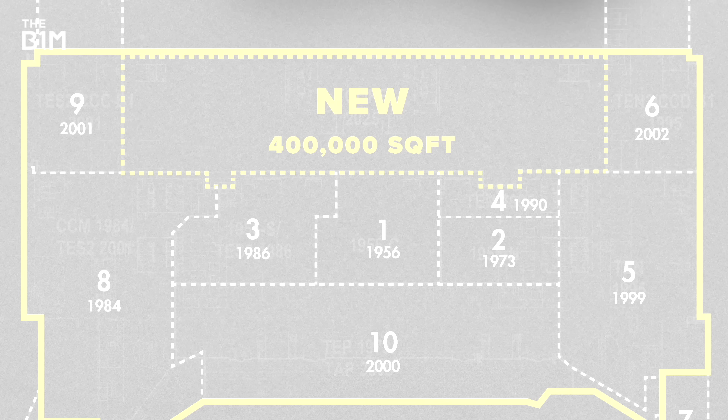Steadfast and reliable, it was always one of America's better airports, but for years it's been in desperate need of an upgrade. The original terminal was constructed nearly 70 years ago in 1956. Over time, development has seen it spread across 11 separate buildings. The problem is that they were all designed and stitched together under varying structural and seismic codes.

And that made it near impossible to expand and evolve pretty important features like security checkpoints. Structural impediments like shear walls and brace frames had to be removed to allow flexibility in case of a need for future adaptations. Portland Airport, or PDX, was in need of a dramatic refresh. And so more than $2 billion was spent to modernise the site.

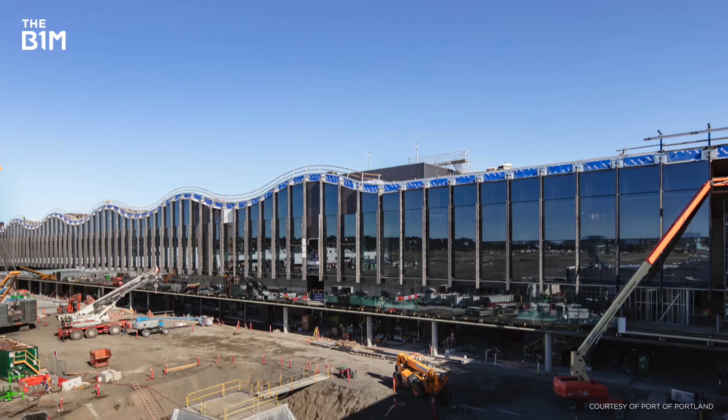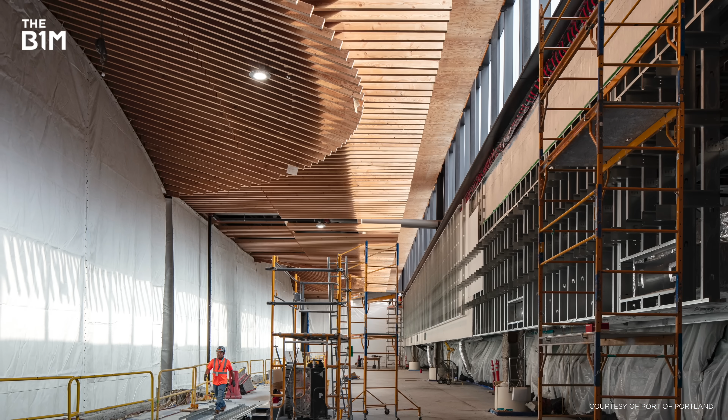Now I know that might sound like a lot of money, but by the end of this video don't be surprised if you're checking flight prices to Portland, because this is no minor renovation. And I really mean that. The new terminal, which opened earlier this year, is the biggest public works project in Oregon's history. Not only that, but it's also the largest mass timber project of its kind anywhere in the world. You absolutely can't underestimate the scale of what's been undertaken here.

But with that said, ZGF Architects and the Port of Portland were keen to make sure PDX still felt accessible and like part of the city. That meant bringing the outdoors indoors to reflect the natural beauty of the state, and working with contractors Skanska and Hoffman, that's exactly what they've done.

The Pacific Northwest is known as a timber basket, the timberland. So we took inspiration from the forest of our region, inspiration as a walk in the park, and then make sure that they knew that sense of place, that this was the Pacific Northwest and not any place else in the country. It took 6 years to establish a supply chain to source all the wood for the roof.

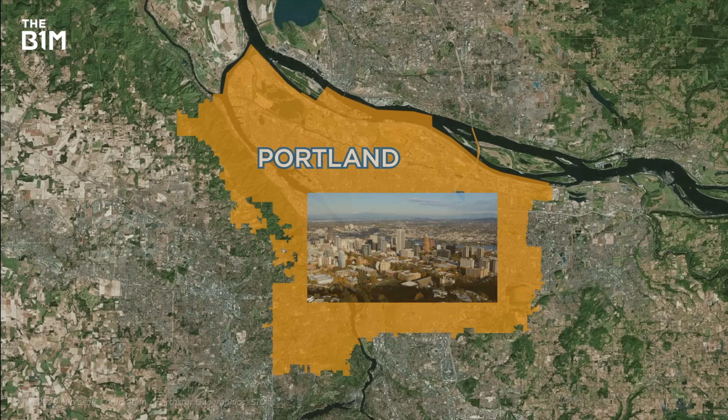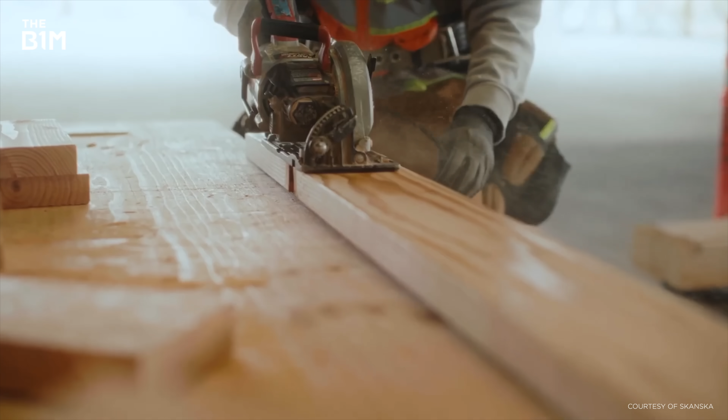And impressively, it was all sourced from within a 300-mile radius of the airport. With mounting budget pressure, a lot of projects focus on importing the cheapest materials from all over the world, but that's not been the case here. The focus was on building sustainably using local craft and timber.

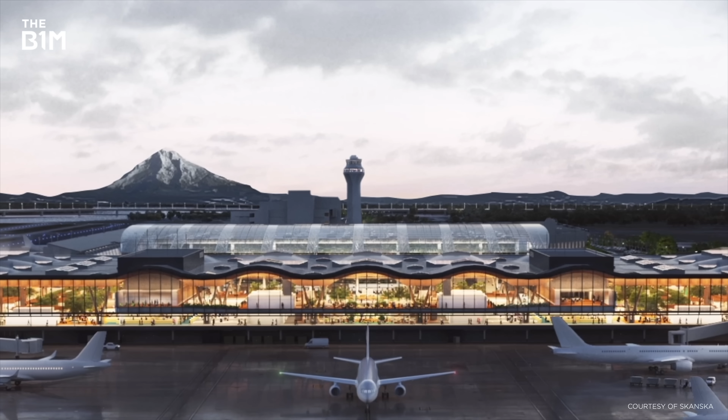Now, let's get back to that beautiful airport. Walking through the new terminal once all the work is complete, you'd be excused for thinking you're strolling through the city's famous Forest Park rather than rushing to catch a flight. You'll see more than 5,000 plants, including fully mature black walnut, ficus and olive trees. They've got access to the natural sunshine that pours in through the 49 strategically placed skylights.

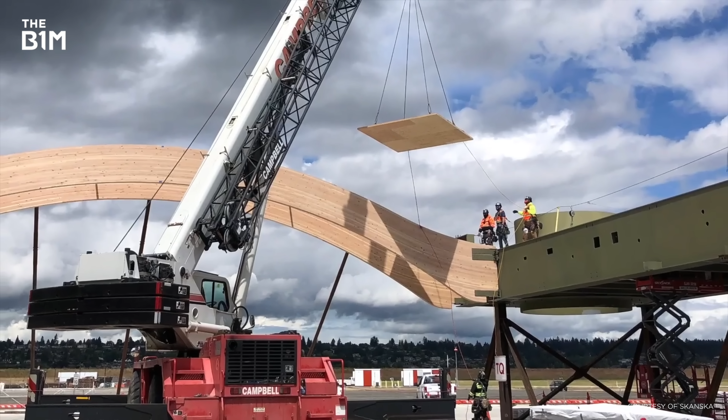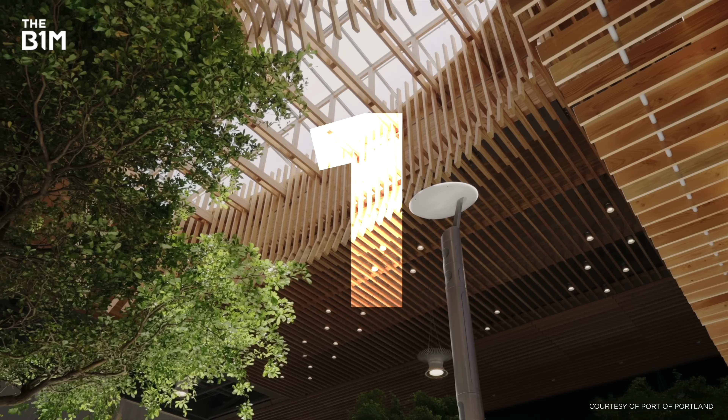The ceiling is a lattice design spanning 9 acres and 600,000 board feet of Douglas fir timber taken from 11 forests. Coupled with the wooden ceiling, a biophilic approach has been used throughout the terminal for 2 key reasons. The first is to sequester carbon emissions and make this project as sustainable as possible. But also, a natural space is thought to lower blood pressure, making your travel experience more relaxing. You might not think of an airport as a calming space, but that really is what Portland is going for.

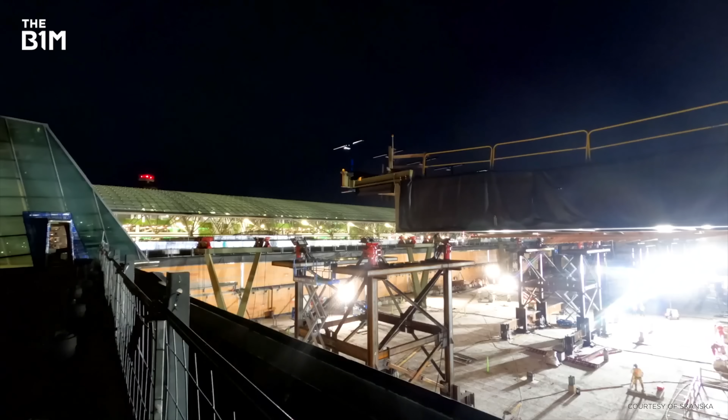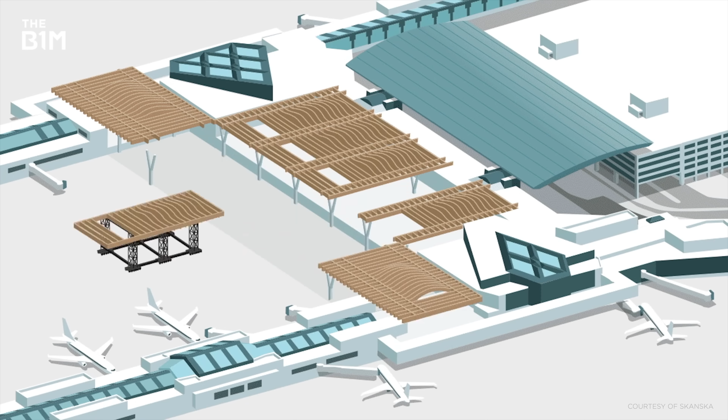It all sounds great and definitely looks the part, but here's where things start to get really interesting. For the entire 3 years that this renovation was taking place on the building footprint, the airport remained open. These major renovations had to navigate a live site operating 500 flights every day. Now, the thought of that might give you a headache, and it probably should, because the logistics of running and overhauling an operational airport are incredibly intense. But here's how they did it.

As I mentioned, the building skeleton is split into various sections with the main terminal in the middle and concourses in the flanks. Key operations like ticketing and security were moved to the front and sides of the building. That allowed for demolishing the remainder of the structure behind while keeping the baggage system operational. Around planes arriving and departing, a section of the airfield became a work site for pre-constructing that incredible roof.

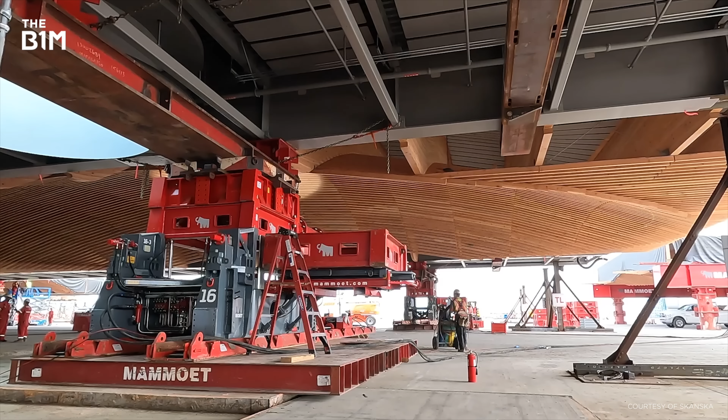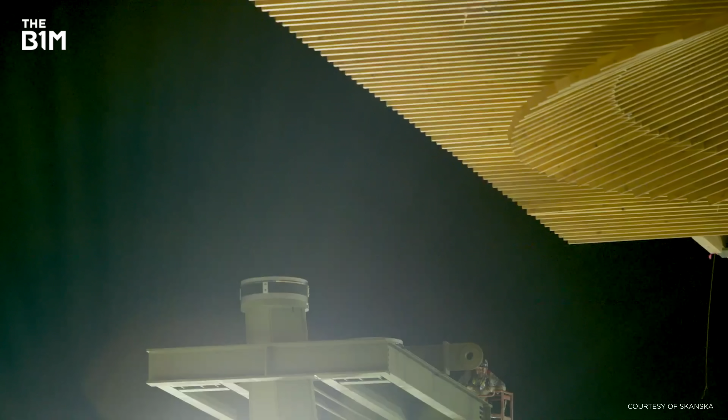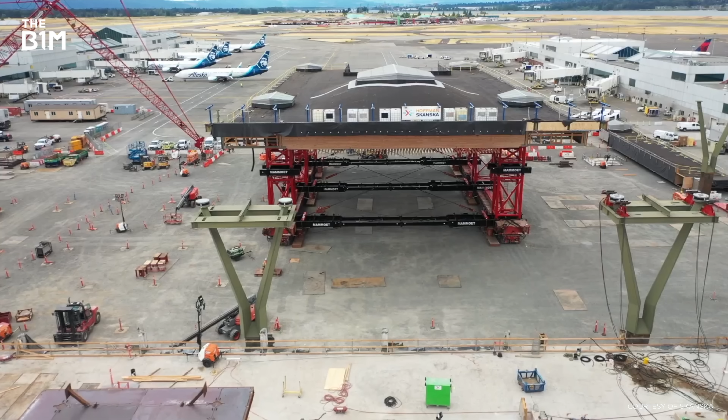It was crafted into 3 massive sections made up of 18 different pieces, with each weighing anywhere from 270,000 to 635,000 kilos. The biggest section stretched more than 40 by 60 meters. The roof was built with big steel box girders, so 2-foot by 6-foot tall box girders on about a 100-foot grid. And then in between those girders was built up with curved glulam beams and the mass timber panels on top of it and a roofing on top of that. And under it was latticed a series of, I think it was 3 by 6 lattice to give the beauty of the roof.

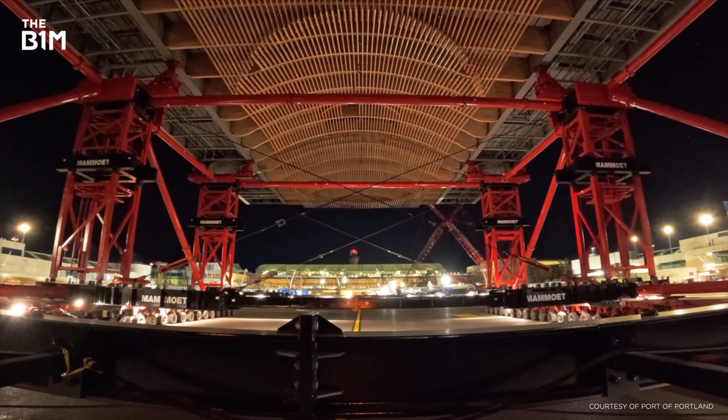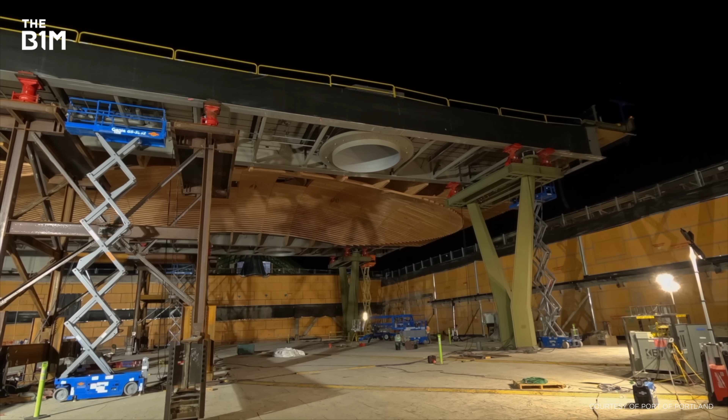To get the roof into position, the sections were separated and drawers slid out from between the girder sections to lift the roof up to 17 meters. They then had to be moved for about a mile from the construction site at the end of the runway at about 1 mile per hour. Each section of roof took around 3 nights to move, one to drive it to the starting position, the second night to move it halfway, and the final night to get it into position. Once slotted into place, security was able to move into the new building.

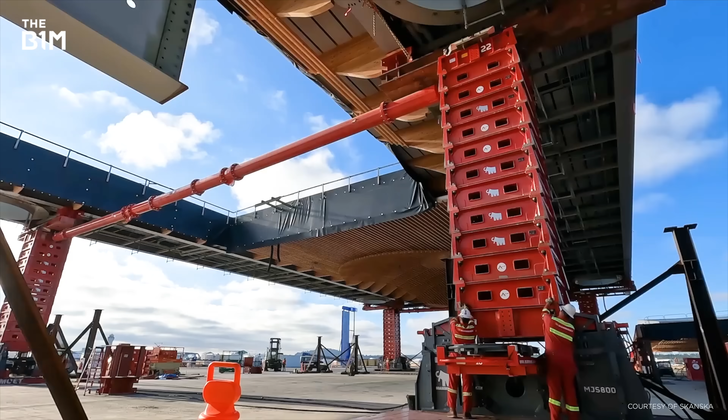Now, it's not every day that you see an airport roof, especially of this size, wheeled across an operating taxiway. And don't forget that there's one key factor when you're working with wood. It really doesn't like getting wet. Going through all of this effort for the roof to then expand and not fit into place would have been extremely frustrating.

But luckily, there was a novel solution. While we were prefabricating the roof, as soon as wood showed up, we would put a temporary roof on it. We'd put a membrane on it to protect it from the elements. And that was the primary strategy in keeping it beautiful before we actually moved it into final position. So a roof for the roof, but this wasn't the only problem the team had to face.

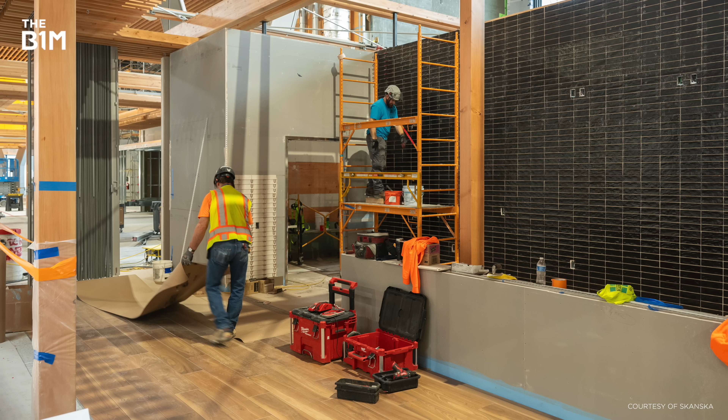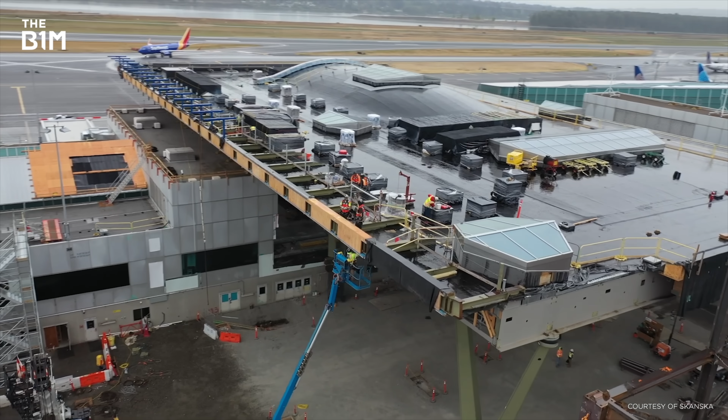The area underneath construction wasn't empty, it was being used for Portland's baggage system, meaning it was an occupied space. And so all the fitting work had to happen during terminal downtimes between midnight and 3:30 a.m. Because we were taking these massive roof sections over an occupied space, during the non-downtimes we had to tie it back in seismically, so if there was an earthquake, the roof didn't fall on the people down below it.

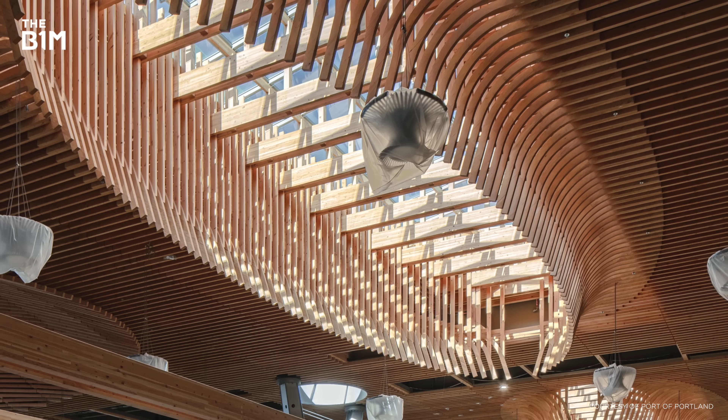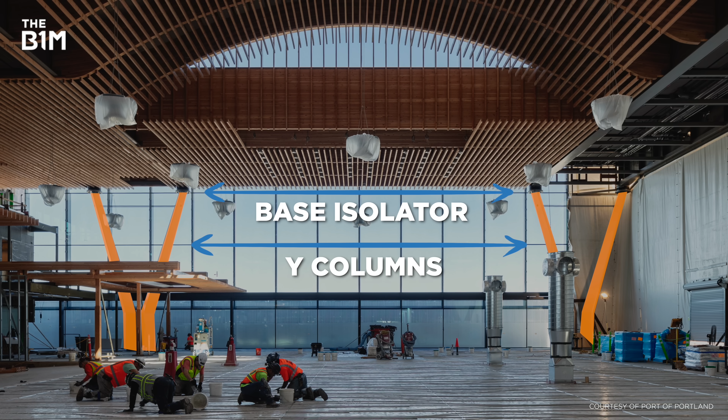Yeah, we forgot to mention another small problem. Portland is Oregon's most seismically active region, with scientists predicting a 37% chance of a major earthquake in the next 50 years. So PDX needs to be ready, and it will be. In the event of an earthquake, the whole roof is designed to move as one. What it's supported on is Y columns, so that the columns come up, and on the top of each Y is a base isolator. It's a friction pendulum isolator.

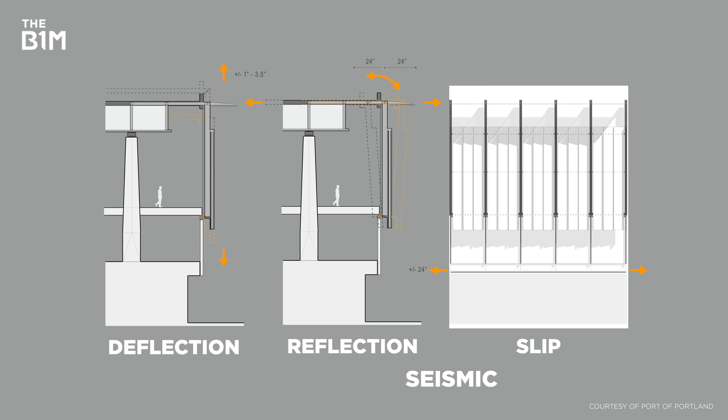And so that has been engineered to take the mass at each location. And so at the edges, you might have a different size friction pendulum. In the middle, you have another size. And those move, and it's calculated that the amount of friction force that is taken at each location allows it to move exactly how much it needs to move. And the friction part is what holds it into place. That allows for 61 centimeters of movement on the friction pendulums.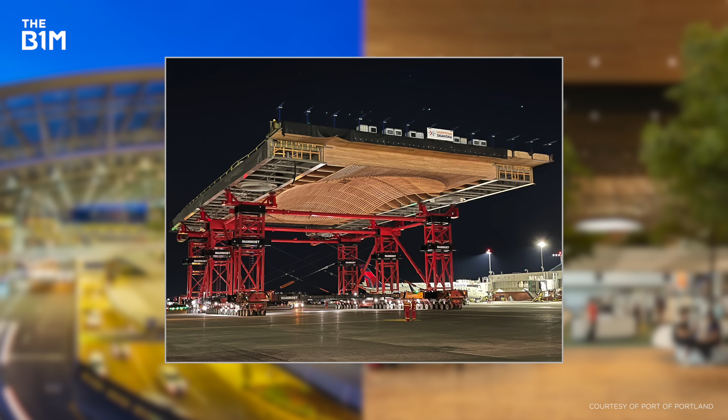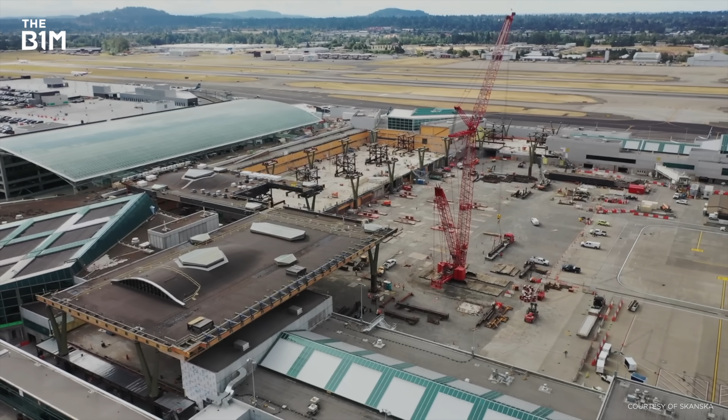That means that where the roof touches adjacent surfaces like solid walls and glass, they have to pivot in all directions, and that took some pretty special detailing, mock-ups and testing. Astonishingly, it's all come together and it really does tick off the big three: stunning, sustainable, and hard as nails. This project has been far from straightforward to engineer, but it'll mean Portland International can go about doubling capacity over the coming years. By 2045, it's hoped that 35 million people will travel through here.

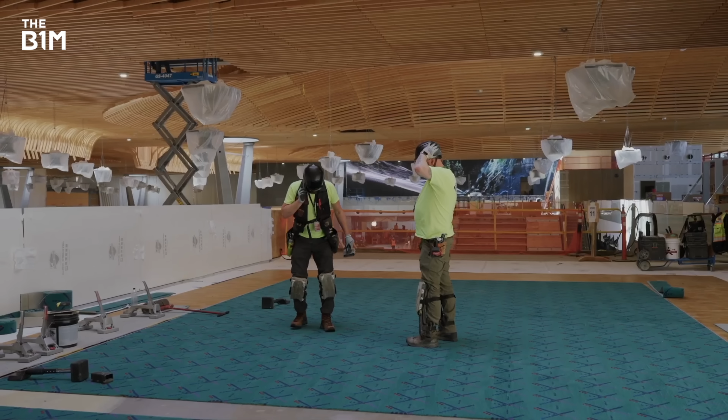And when they do, they'll be met with a sense of whimsy that really sums up the city and this project. If you've been here before, you'll be familiar with the famous PDX carpet. Some would say it's the most iconic in the world. Stiff competition for those found in the UK's Wetherspoons pubs. But if you're worried about missing it, don't be, because it survived the renovations. You'll find recreated sections of the carpet hidden around the airport in relaxing areas ready for snapping shoe selfies, if that's even a thing.

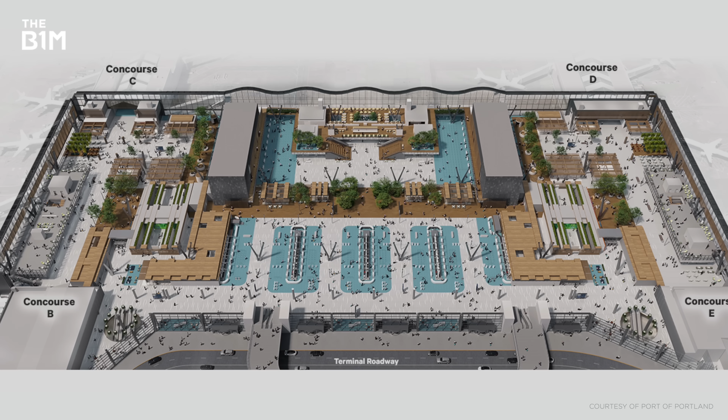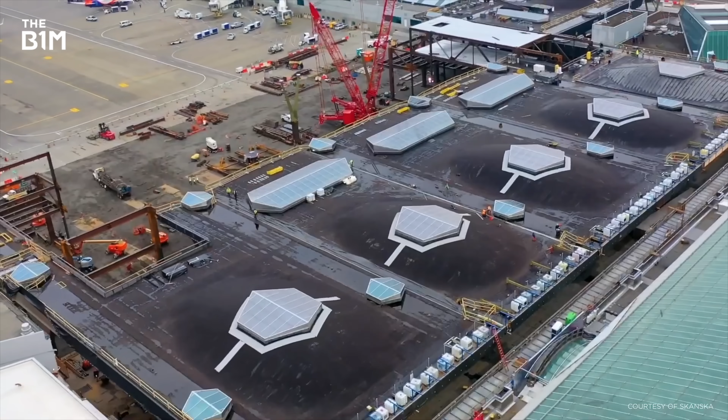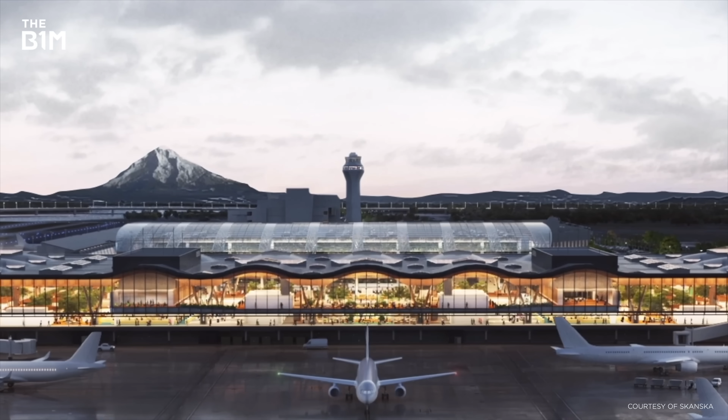All jokes aside, getting to this point has been a monumental effort, but the work isn't finished yet, and Phase 2 is now already underway. It includes 11 new restaurants and shops, permanent exit lanes, more escalators to baggage claim, and cosy areas for when you're waiting at arrivals. They're planning to have all the hoardings down and works complete by late 2025. Only time will tell if PDX can land itself a spot near the top of the world airport rankings. But whatever happens, it's beautiful. This place is a shining example in American aviation and a precedent for the future.